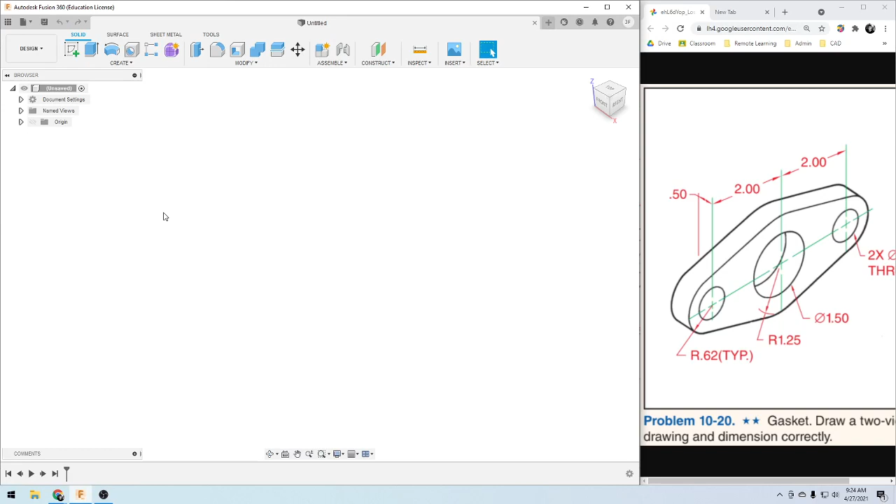Hello and welcome. In this tutorial we will be creating a gasket shown here to the right and assigning aluminum as the material and then obtaining the mass of the gasket.

So first thing you want to do is load up your Autodesk Fusion, and first thing I like to do is save. And I'm going to create a new folder here and call this part projects, and I will save that there. Yep.

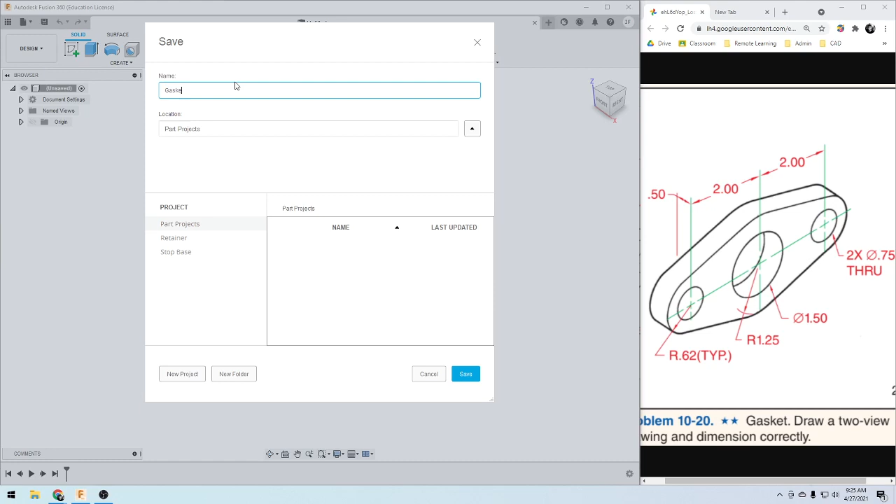And actually, I'm going to create a new project here, and this is going to be part projects. I recently had to reinstall my software, my operating system, so this is why I'm having to redo this. Okay, so part projects, and that's where I want it, and it's going to be a gasket. Save it. So now I have version 0 of gasket, version 1.

So quickly I'm just going to kind of look at the gasket itself. So it has 3 holes. They're all through holes, and the outside have a diameter of 3/4 of an inch. The inside is 1.5 inches, and then they have radii measure for the ends, so that's a 0.62, and TYP typical, meaning that this is the same over here. And then the middle radius is 1.25.

So what I'm probably going to end up doing is, so these lines are tangent. So the line that's going to connect this large radius to this smaller radius are going to be tangent to each other. And what I can do is create this entire geometry, this entire sketch, and then just extrude out that plate without the holes, without extruding the holes. So that's kind of the game plan, and the extrusion is going to be 1/2 inch.

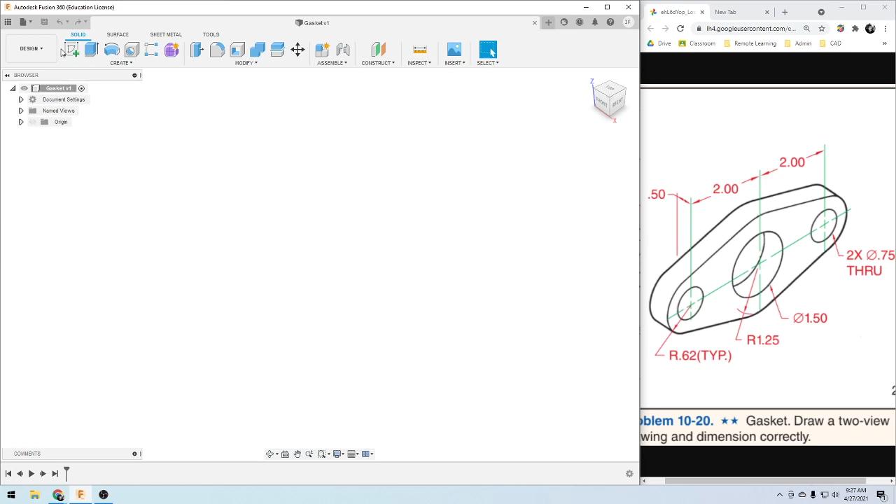Alright, so we're in design. I'm going to create a sketch, and then I'm going to choose the front. So click on front. But first things first, right? I'm already forgetting, I want to make sure that I'm in inches. So let's go into document settings, and I'm in millimeters. So I'm going to click on there to change that into inch. Now we're good.

And probably going to just make a center point. So this center point right here is going to be my origin point, because I'm dealing with circles here and not many rectangles or squares or anything. So I'm just going to start out right in the center, and I'm going to make this circle here, and I'm going to dimension that to be 1.25 times 2. So remember, you can do that, 1.25 times 2, or if you know what it is and you're absolutely positive, you can just type it in.

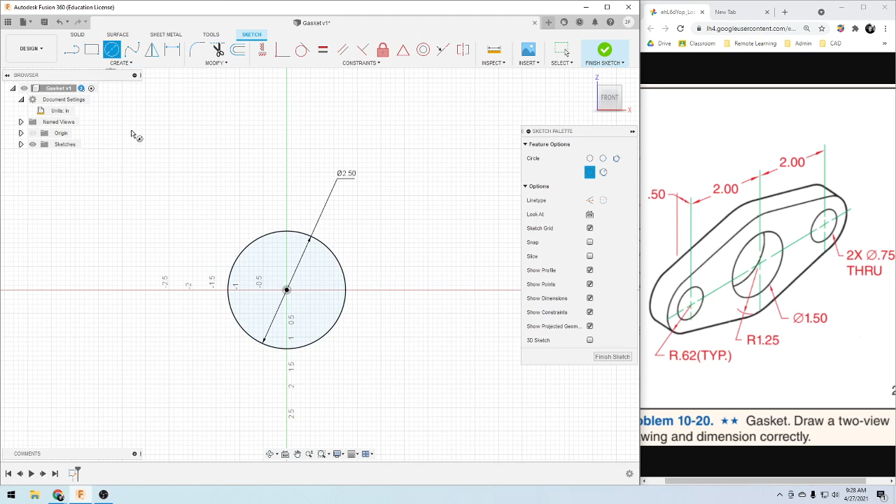The next thing I'm going to do is create a circle out here, and then I'm going to create a circle out here, and I'm going to make them equal to each other and dimension them. So radius is 0.62, so 0.62 times 2. Notice they both got larger, and then they are 2 inches away from the center point.

And I will create a line from here to here, and again from here to here, here, here, here, here. So I do want to make all of these tangent, so I'm going to add that condition. So I'm going to click on this line, click on there, click on this line, click on there, click on this line, click on here, and just going around making these constraints because they're tangent.

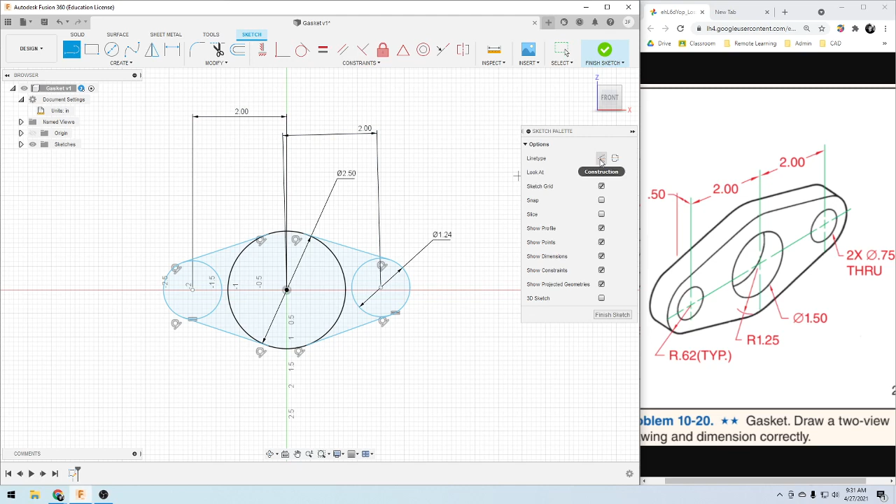I'm actually going to just create a line that is a construction line, and I'm gonna just bring it all the way out here, and then go all the way through the center here. And now I can coincide the center point. So this line and then the center point. That's not what I wanted to do. First I need to coincide the center points here. So coincide the center line with this point.

Okay, that's good. Center line with that point, and now center line with this point. What was happening is I didn't anchor this line, so it was moving up, and that's not what I wanted to do. So now that it is all black, that means I am fully defined. I'm going to see if this trimming is going to mess with anything, and it didn't over there, so that's a good sign. Didn't over there. Okay. And that looks good. So it's still fully defined.

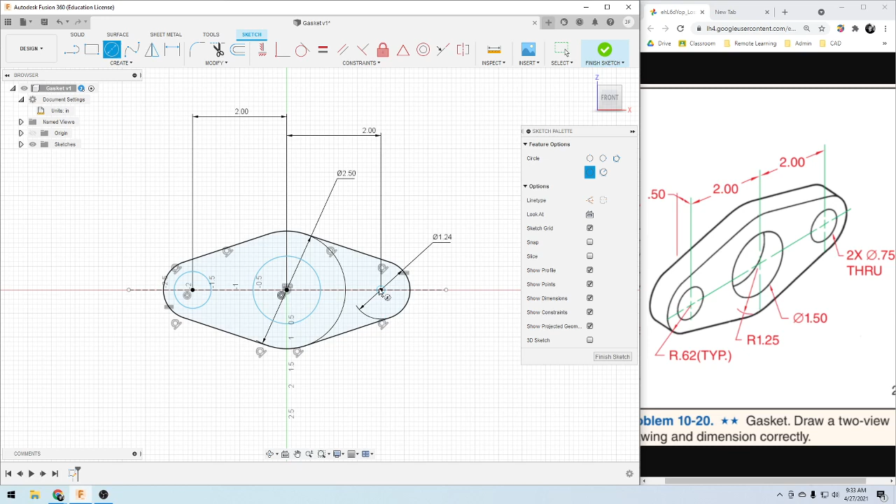So 1, 2, 3, and then I'm just going to dimension these. This one is 0.75. This one is 0.75. And this one is 1.5. From here, I'm going to extrude.

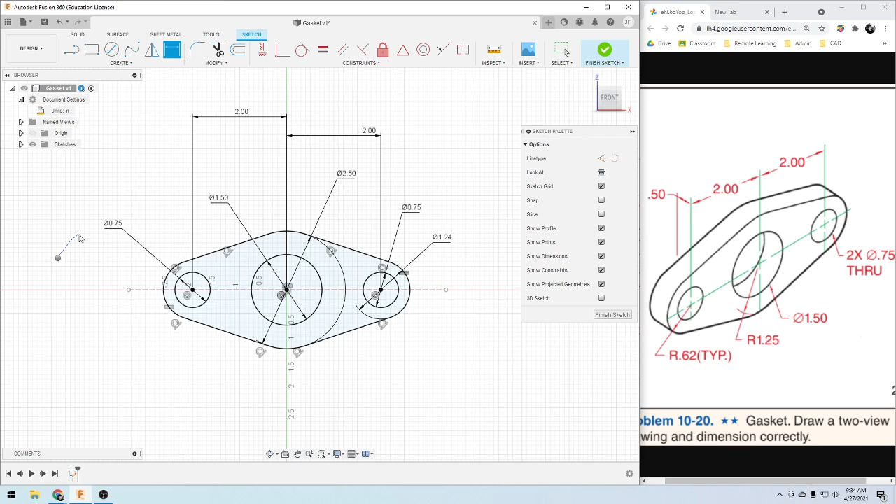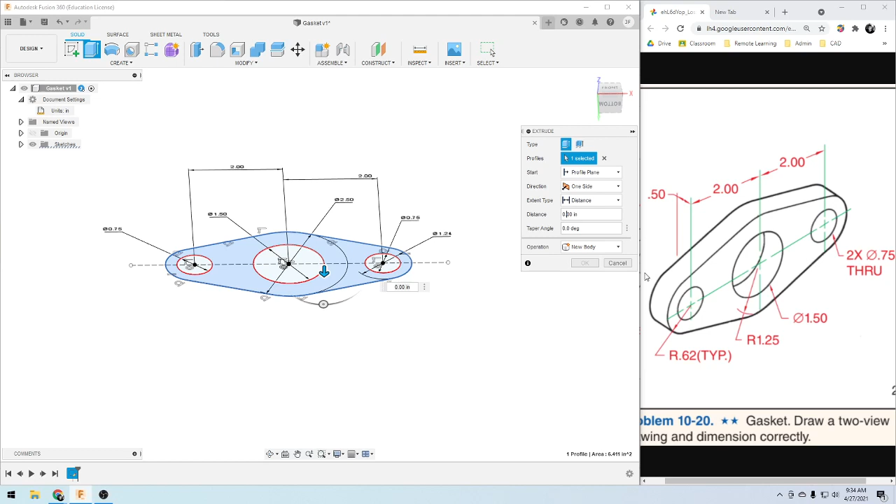So I can go over to solid, or I can right click and drag to get my press pull. So I hold on, right click and drag to the northeast, and then this press pull will come up. I'm going to click in here, and notice that it is pulling what I want it to pull, and I'm going to make it a distance of 0.5. So there you have it. You have your little gasket that's 1/2 inch thick.

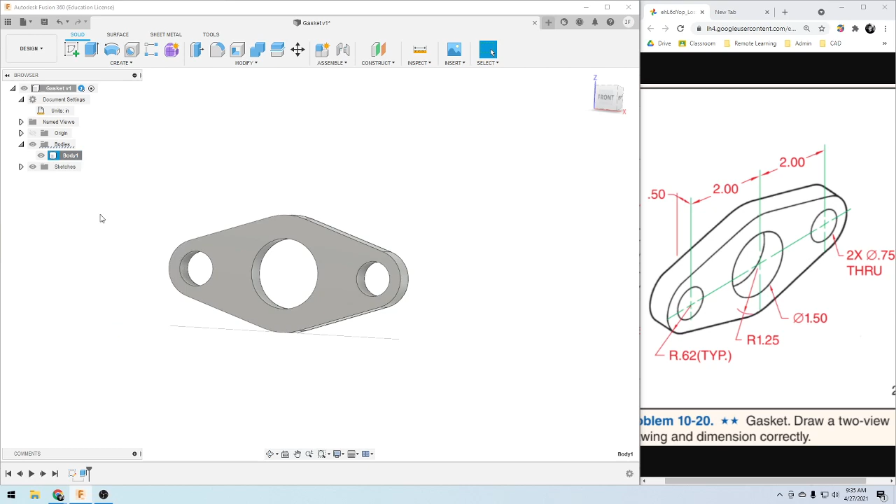And so now I'm just going to assign a material to it. So go to bodies, right click on body, and go down to physical material, and for this one it will be a metal, and then we're just going to do aluminum. So click and drag and drop it out there. It should change color on you. It's like a lighter silvery color.

And now I'm going to obtain the properties, so you can right click on it. Right click on the body over here, click on properties, and now you should have a mass. So it should be about 5 ounces. So 5 ounce mass. And there you have it.